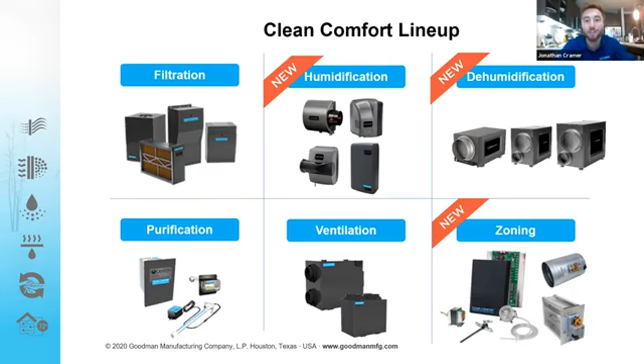So why Clean Comfort? Why would you want to sell our zoning equipment or any of our other products over the competition? It comes down to having very large buying power, but also quality relationships. This presentation isn't just me helping you extend your sales, it's also our vendor. That relationship shows we're committed to growing the Clean Comfort brand and getting you excited about all the products we have to offer.

We have over 8 companies that make up the Clean Comfort product line, with over 40 plus products in North America. It's easy to say we evolve and keep adding, since we already released 3 things in 2020, which was a difficult year for a lot of companies, but we hit the ground running and we're going to continue running in 2021.

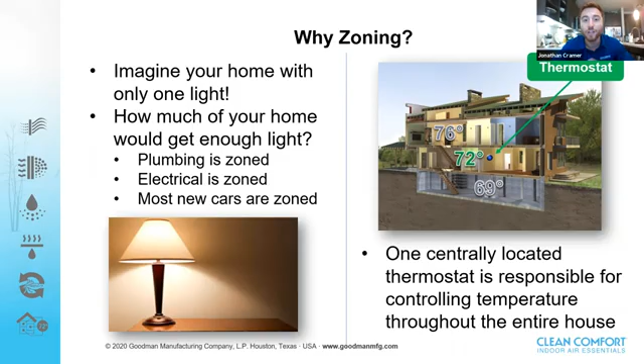Especially in 2020, and who knows what 2021 will look like, we're spending more time than ever at home. So why shouldn't we be comfortable in the house we're in? For homeowners, there are easy ways to not only improve comfort and ease of system, but also address areas of the house that are too hot or too cold. Maybe that simple house you just saw is a very easy application to sell zoning to as well.

Let's say you have a 1-story house, but you don't go to certain areas of it. You could still use zoning for that, and it's still beneficial because maybe you don't go to those other zones as often as the primary zones. That's one way you can see energy savings, because you're not running the system to satisfy the whole house, just the zone where you spend the majority of your time.

Now obviously in 2020 everyone's home, but who knows what 2021 looks like. Let's say kids are going back to school, spending 8 to 10 hours a day there, and maybe no one's upstairs. We can not satisfy that zone, keep it at a higher temperature, and just satisfy the zones where someone's working.

As you can see, energy savings. Now you want to be a little careful when saying it can save energy, because there's a chance a homeowner in Houston, Texas wants to be at 68 degrees in all 3 zones. In that case, you're running your system just as often, if not more, than without zoning. So you just want to be careful and explain the areas and ways it can actually save them.

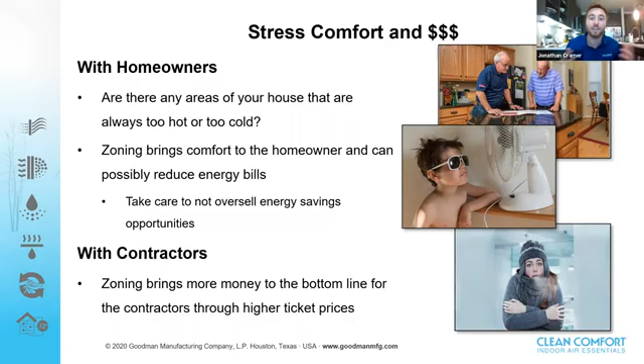For contractors, it's just adding more to your bottom line. It's also an easy way to get into IAQ with the homeowner by saying, this is a small step, we also have other options as well. So you're getting that full IAQ package, which is really popular right now.

What's cool about our Clean Comfort product lines, both premium and economy versions, is that they accept any thermostat, which is directly in line with what Goodman and Amana are doing right now with the Comfort Bridge product. With Comfort Bridge, you can use any 24-volt thermostat.

Same goes for our Clean Comfort. We're trying to put the thermostat decision in the hands of the homeowner. We're not telling you that if you use our zoning equipment, you have to buy a $400 or $500 thermostat. Any 24-volt single works. So Ecobee, Nest, Braeburn, Honeywell, all work perfectly with those, whether programmable or not.

The only thing that matters is for every zone you have. For example, if you bought a 3-zone system, you need three thermostats, and we recommend them to be the same brand—so 3 Ecobees, 3 ProStats, what have you.

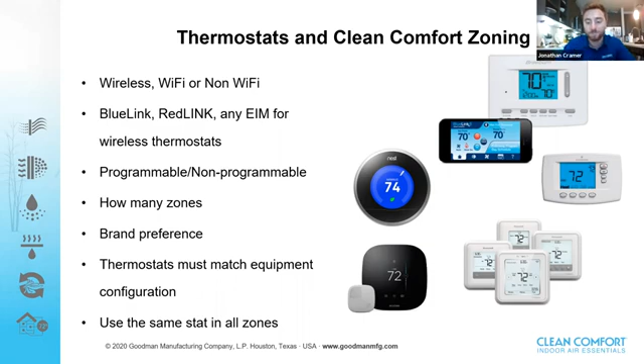Talking a little more about ComfortNet versus Comfort Bridge—that's a whole different presentation. I recommend you guys check that out, since there's a topic on that for the summit these past 3 days.

ComfortNet was kind of our older technology. All the staging, the algorithms for fan speeds, all of that was configured on the actual CTK04 thermostat. Now with Comfort Bridge, all of that is handled inside the system itself—the furnace and air handlers now handle the staging, timing, and fan speed internally. With the CTK04, the thermostat controlled all that; with Comfort Bridge, it's all in the furnace, air handlers, and indoor units.

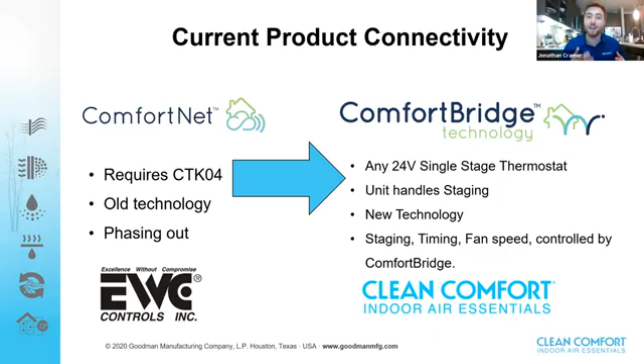That's one of the big differences with Comfort Bridge—it's doing its own thinking, learning, and running algorithms based off itself. So for Goodman and Amana, the perfect zoning solution going forward is always going to be Clean Comfort. We're really excited about that, especially with all the Comfort Bridge launches—we're almost going to be solely using Comfort Bridge in 2021, if not already, since it's already out for the new air handlers.

So what does a normal zoning system look like? I think a lot of you joining this call are very familiar with the ways to regulate static pressure. There's two: you could use the barometric or you can use an electric.

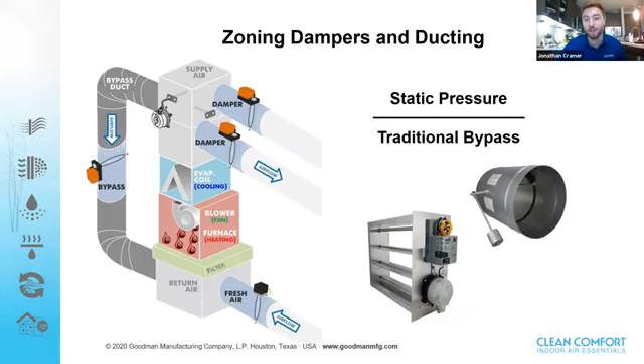But let's say you see a loved one walking by on a hot summer day and you think, I'm just going to spray them, but the hose won't reach. Well, there's only one way for the water to get to them, and that's for you to block the nozzle. When you block the nozzle, you're creating pressure, and the water only has a very small diameter to go through, so it shoots out even further.

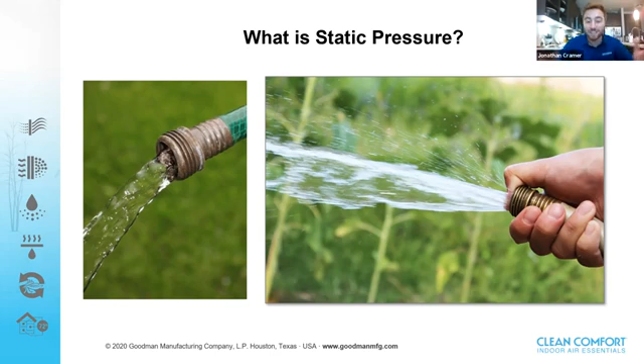That simple technique and thought process sounds silly, but let's apply that same logic to our HVAC and zoning equipment. Let's say we have a 3-zone system that we just set up in this brand new house with our homeowner, and they're excited about it. We're now going to set it up, but we did not install a bypass. So this is for not having a bypass, not having anywhere to regulate that static pressure. We just installed the zoning equipment and said, hey, I'm not going to worry about it.

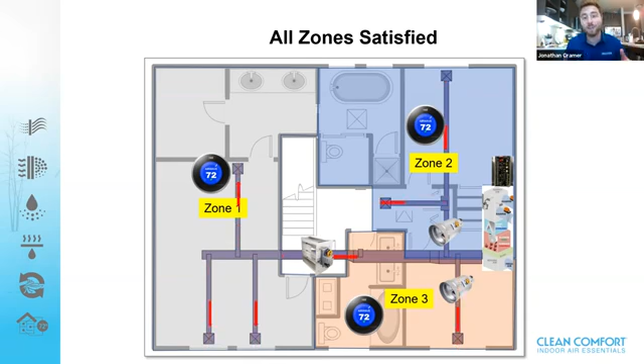As you can see, if everyone wants 72 degrees, everyone's happy, everyone's calm. It's kind of just like that hose, right? It's just going through the hose, nice and easy. There's no complaints because there's no one walking by that I want to spray with water. Same goes with the zoning equipment. Everyone wants 72, so everyone's relaxed and comfortable.

But let's say zone 1 says, hey, you know what, I'm good at 72, I don't want that, I want it to be 74, it's a little cold in here. So now we only have 2 zones calling out of the 3-zone system. As you can see, the red arrows are picking up, getting a little bit faster. Maybe the people in zone 2 and 3 are noticing it's a little bit louder when it's running.

It's uncomfortable, something doesn't sound right like it did before, when I didn't have zoning equipment. Then zone 3 says, you know what, this is just a little too loud, I'm just going to shut it off, I'm good at 74, I don't really need to be satisfied right now. So now zone 2 is like, well, I still want 72 degrees. So now those dampers are completely closed, and we're blocking airflow from going from either zone 1 or zone 3, and only zone 2 is getting airflow.

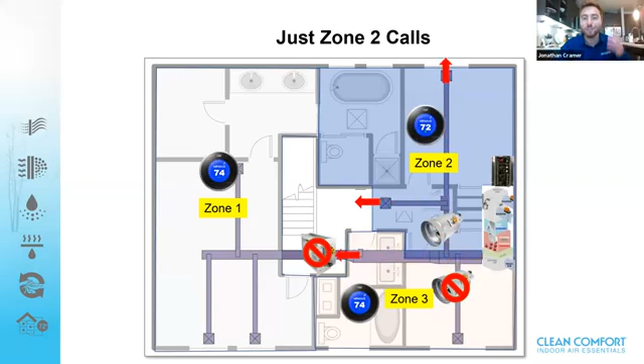Can you imagine what it would feel like if you were in zone 2 right now? If you had papers on the desk, they'd be flying around. You'd be hearing a lot of noise you're not used to hearing. What's the homeowner going to do? They're going to call the contractor and say, hey, something's wrong with my system, it never sounds like a bat out of hell. Stuff like that is just going to happen when you have only one way for the air to go, through one zone at a time.

Well, that's not the only thing, that's just what the homeowner is going to sense. Obviously they're not going to go up in their attic and pull it out, but if they did, they'd see all kinds of stuff wrong. The coil can freeze up, you're going to be tripping your limits, it's going to be super noisy, it's going to be damaging the ductwork. There's just a lot of issues when it comes to static pressure. So this is just what happens when we don't have a way to regulate static pressure.

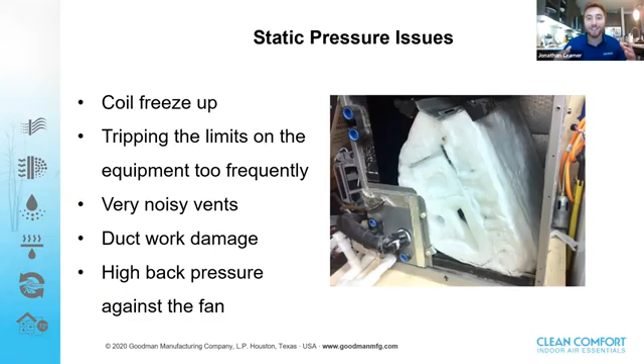So with our new Clean Comfort product line, we have an easy, simple way to do that. And I'm going to pass it off to Jared.

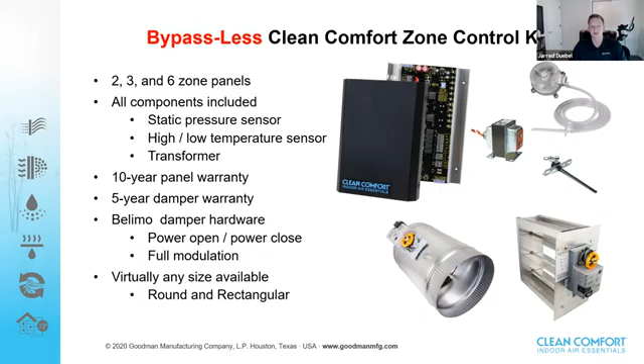Same thing with the rectangular dampers - typically anywhere from like a 10 by 8 all the way up to say a 24 by 22 are going to be our more standard sizes. And then we can do specialty or more commercial dampers that can be as large as the desk that you may be sitting at.

So let's talk about how ESP works. In order for it to be a bypass-free system, we have to do something to regulate static pressure. The special sauce lies in this static pressure sensor.

On a traditional or old school zone control system, it's pretty common that you'd have a section of ductwork installed from your supply air right back to your return air. Like Jonathan mentioned with the barometric or electronic bypass dampers, typically you'd have that installed in that section of ductwork. You'd either set it via a weighted arm, or a static pressure sensor on electronic type bypass, set to where when you reach a specific level of static pressure or resistance in the system, it would open that damper and start automatically bleeding air we've already conditioned straight from the supply back into the return.

First of all, that's not very efficient. We're taking air we've already conditioned and then reconditioning it. When we start to bypass too much air, not only is it not efficient, but we can run into issues like freezing up coils, tripping limits, and in extreme situations even cracking heat exchangers. So our ESP system completely eliminates the need for bypass.

It's a great value to contractors, and any of you watching that have had experience installing a traditional bypass, I'm sure you're nodding your head saying that anytime you don't have to do that, it's a good day. It saves on time, money, and the effort of going around taking static pressure readings and getting that bypass damper set just right.

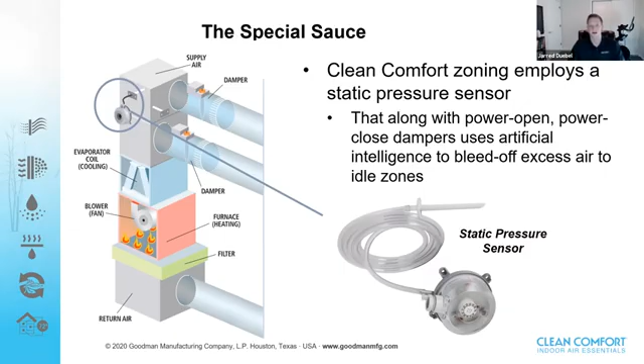We also give you options on the panel where you can specifically adjust which dampers you'd like to offer the zone bypass option on. As an example, this gives you an idea with ESP. Zone 2 is your zone calling, we're pushing all of our air to zone 2. However, zone 1 damper and zone 3 damper, we're going to go ahead and just crack them ever so slightly to relieve some of that pressure.

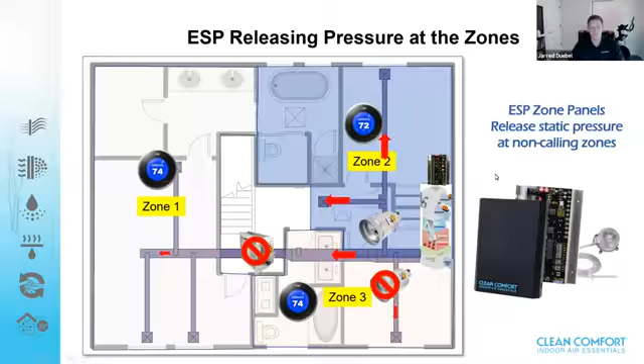We have 3 different types of this panel, both in the ESP and in the standard version. First of all, you have the 2-zone panel, which is your more rudimentary type panel. We see these in multifamily type applications, small zoning type applications, but your 3-zone panels are going to be the most common. The 2-zone panel also comes with a 10-year warranty.

You're going to get the kit, everything that you need in there. If we look at the nomenclature here, Clean Comfort, CC stands for Clean Comfort. Then you have 2 for a 2-zone system. HC stands for heating and cooling, or heat cool. And then you have ESP, which stands for electronic static pressure.

And we put a dash kit on there, just so you know you're getting everything that you need in that zone control kit.

Now, when we jump over to our 3-zone options, again we have 2 different versions here, both multi-stage versions. So we have CC3, Clean Comfort 3-zone, Heat Cool multi-stage, which is your conventional version, and then ESP again for bypass free, and kit. Okay, and then on our dual fuel or heat pump type version, it's again CC3, HPS for heat pump series, ESP bypass free system, and then of course you get the kit, everything that's going to be involved there.

Now these 2 panels here side by side look insanely similar. There's just very small features on there. They're a little bit different that differentiate the heat pump or dual fuel type panel from the heat cool multi-stage conventional. And I'll run over those here in just a moment.

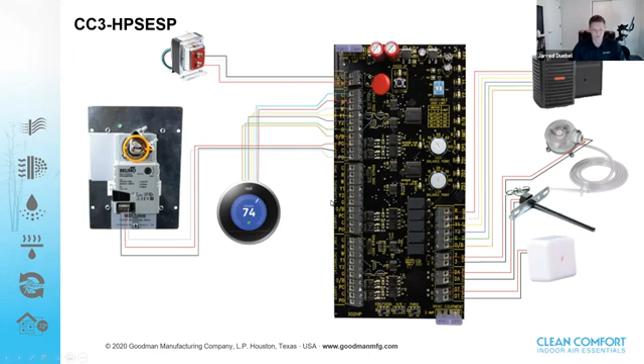Here's a little bit more of a close-up on the panel. Again, you've got your hot and common, W, Y1, Y2, G, and then OB for the reversing valve. And of course, Y2 is going to convert over to W2 when we switch into heating mode.

On the zone bypass, I mentioned earlier that we give you the option to shut off specific zones. Sometimes people ask, well, if you're bleeding air into zones, are you going to over-condition specific spaces? The response is, on 99% of systems, no.

The reason being is at 0.35 inches of water column, and we're cracking those dampers typically about 6 to 8%, the amount of air or pressure we're releasing is minimal. It's not like a zone that's calling, where we're pushing a good amount of airflow into that space.

However, depending on the system, you could run into a situation where you'd actually bypass too much air into a specific, really small zone.

So I always give the example of my house. My son's nursery is a very small bedroom. It's a child's nursery, and then when you look at the master bedroom, the spare bedroom, and the living area, those zones are much bigger.

So for that reason, if you have a very temperature-sensitive area, like the zone in my son's room, you can actually shut off that specific zone.

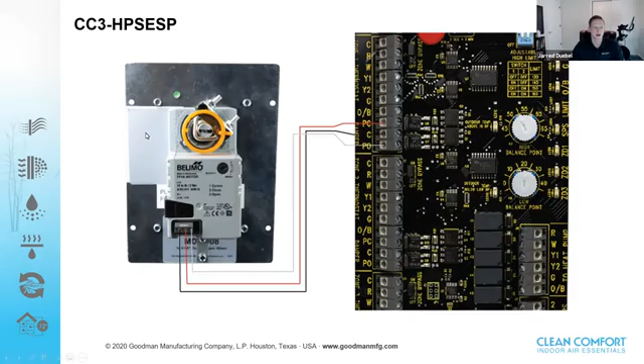And lastly, this orange ring right here, that's a position indicator. So since this orange ring is pointing in this direction, I know that it is directly parallel with my damper, so I know that damper is in the open position.

Okay, so now let's talk about some of the specifics on the kits. One thing that's unique about our zone control panels is we actually offer ventilation mode, or we offer the priority to have independent fan control by zone.

So what does that mean? Well, just like we zone heating and cooling calls and we open dampers where we want to push the air, we do the same thing with ventilation. Typically in a zone control system, we recommend you run continuous fan. What that means is when all zones are satisfied on a traditional zone control system, all those dampers are just going to go to the open position. When we're running ventilation mode, we're running the fan in low speed, slowly ventilating air all throughout that zone system. Well, what we do is we take it to another level. We say, well, why not prioritize where we want to ventilate?

So it's a very simple way that you can do so. It's set through the actual thermostat. Let's say zone 1 is my master bedroom, zone 2 is a spare bedroom, and then zone 3 is my living area. Well, I spend most of my time in the living area, so I want to ventilate in my living area. So whenever all zones are satisfied, I want to prioritize my ventilation towards that area.

Very simply, I would set the zone thermostat in my living area to the fan mode to on or continuous, and then I go to the bedrooms, I would set the fan mode to auto. So what that tells the zone control system or our zone panel is when all zones are satisfied, we're going to go ahead and open the damper to the zone that we've set the fan mode to on or continuous, and then close the dampers in the zones set to auto. So you can get really creative with that feature, and I've talked to a lot of contractors that have done so, especially when you start adding in ventilation systems, UV lights, electronic air cleaners, things of that nature.

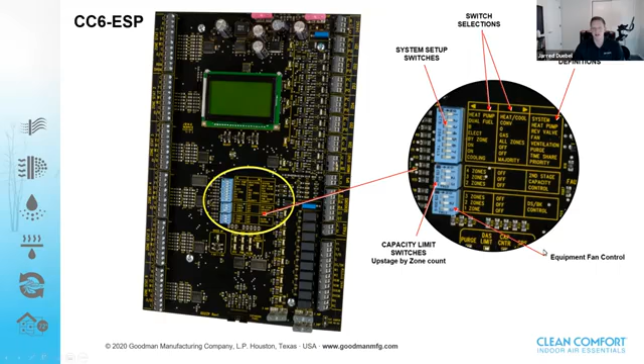A couple more features on the dampers. Again, power open, power close, 2-position floating point actuators, BELIMOs, 2.5 VA rating, 60-second stroke—which means when I put 24 volts to that damper, it takes 60 seconds to open and close it.

Now, we had a question the other day. Someone said, well, hey, if there's an existing 3-wire damper and I want to stick an ESP panel on it, can I? And I said, absolutely—so long as it's a 2-position floating point, especially if you know it's a BELIMO actuator. Timing's irrelevant because the logic built into the panel doesn't require anything specific as far as timing is concerned. The only time we've ever run into an issue is the way a Carrier Infinity actuator works—it's a little bit different. So if you run into that type of situation, give us a call on tech support and we will walk you through what you will need to do.

Again, from 6-inch to 16-inch round, we can do larger, and then from 6x6 all the way up to 36x32 on the rectangular. So as far as nomenclature, clean comfort, 3-wire, you're going to have, let's say, a 10x8.

That's going to be a side mount damper. If I want a bottom mount where it's going to be mounted on the 10-inch side, I would use the part number CC-3-wire-1008-BM for bottom mount. So on all the standard dampers, you can always assume that the motor is going to be mounted on the smaller dimension. So again, on a 10x8, the motor is going to be mounted on the 8-inch side. On a 10x8-BM for bottom mount, it's going to be mounted on the 10-inch side.

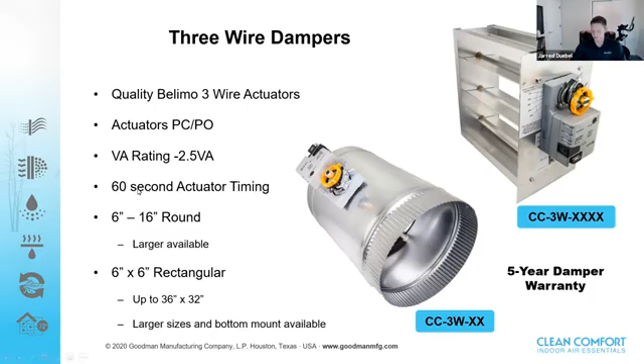Okay, now this is our economy zone control panels and kits. Again, they're all going to come in kits just like the ESP. You're going to have the 2-zone, the 3-zone panels, and then the 6-zone expandable up to 12. We also offer the 2-wire more standard type dampers with those zone control systems, but you can put 3-wire dampers on those systems.

The most notable feature between the ESP and the economy line is that you need to regulate static pressure with the economy line by means of a bypass damper or some other means, because you're not going to have that static pressure sensor.

A lot of the same features and benefits. So you're going to have a high-low temperature sensor preset at 42 degrees, adjustable between 130 and 160 degrees for discharge air. You're going to get that 30 VA transformer. We're doing a 5-year warranty on the panel and then a 5-year warranty on the damper.

Again, we can offer all the same sizes that we can with the 3-wire actuators, and most notably, they are completely universal, just like our 3-wire dampers. When it comes to Aprilaire or Honeywell or EWC, they're all completely universal and interchangeable.

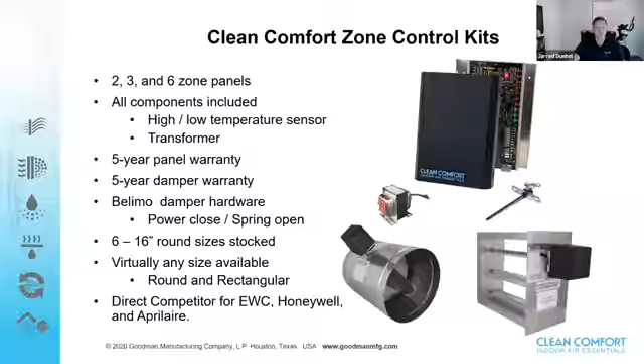So when you're regulating static pressure on the traditional type system, you're going to want to use either electronic or barometric type bypass damper. Again, that's traditionally going to be installed right here in a section of your bypass duct, and you're going to make sure that you're going to set either that weighted blade or that static pressure sensor for the electronic bypass damper to alleviate static pressure at a specific threshold.

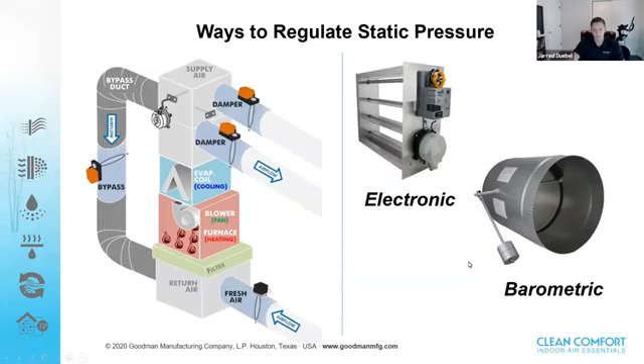And then the Clean Comfort 2-zone kit is our more rudimentary kit. Like I said, on multifamily projects, we see these more so. They're just a single stage panel, more economically friendly there as far as the budget is concerned. However, the 3-zone control panels are by far our biggest movers.

And then again, we offer the heat cool multi-stage and then the heat pump series, just like we do with the ESP type panels. The biggest differences you're going to notice, again, there's not going to be those SPS terminals to install that static pressure sensor. One feature I had not mentioned when we were going over ESP is we do offer 20-minute timeshare. It's built into our panel, which it's that way with all of our zone control panels.

If you have a situation where a zone is calling for heating and another zone or two zones are calling for cooling, maybe the stat in that zone calling for heating is broken, or maybe one of the kids went and messed with it and turned it up as high as it could go, so the system's just not satisfying that zone. After 20 minutes of attempting to satisfy that zone, our panel will drop the call, go satisfy the other calls that came in, and then come back to the call that's needing to be satisfied. This is great for apartment or duplex type situations that are zoned, so you never run into a situation where some zone doesn't get the air it's calling for.

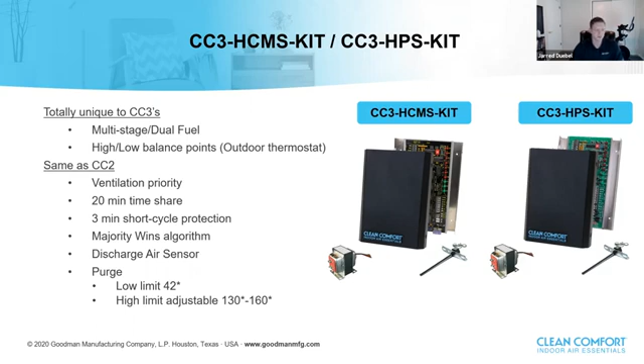You have that 6-zone control panel. The biggest feature difference between the economy and the ESP line, outside of not having that electronic static pressure control, is that you're not going to have that LCD display. Some of the features I mentioned, such as the upstage timer, are going to be based on switches on the board.

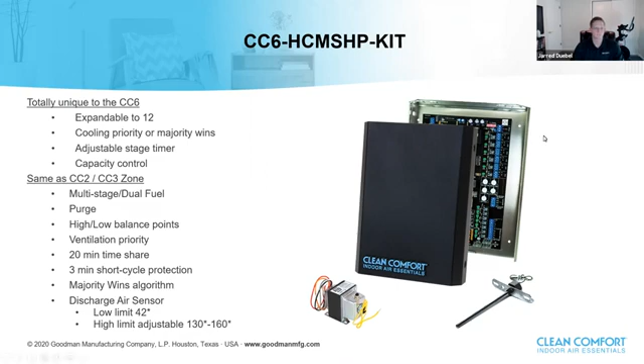On these 2-wire dampers, in a zoning type situation, your damper is typically going to be power closed spring open. We use power closed spring open in zoning because if we ever lost power to the panel, we want it to spring to the open position, since we wouldn't want any zone shut off. On the flip side, if you want to use one of our Clean Comfort dampers as a ventilation damper, you can set it up in a power open spring close application, so that if it loses power it comes back into the closed position, preventing an open hole from the outside of a home that would allow air to come in at any time. There is a position indicator on the damper.

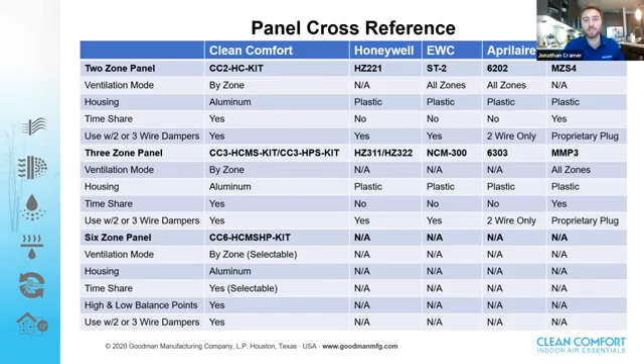So as you can see, we had talked about the panel cross-reference. This is just an overview of what Jared was able to go over, at a high level. I appreciate that.